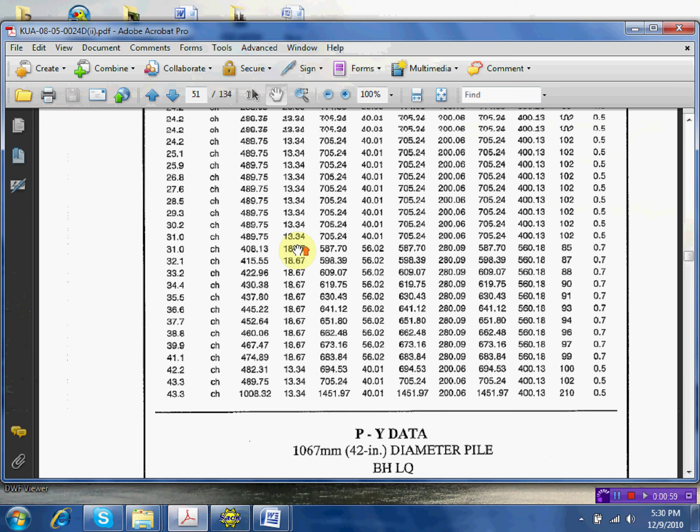We have PY data. The PY data represents the lateral springs of the soil, and QZ represents the bearing. So we will use this one in our PSI modeling.

Take note, our pile diameter is 36 inch or 90 centimeter. It depends on the parameter. For example, if you have a 42-inch diameter pile, do not use this in 36-inch. The pile diameter should be the same. In our case, the diameter of pile is 90 centimeter or 36-inch, so we will use the 36-inch.

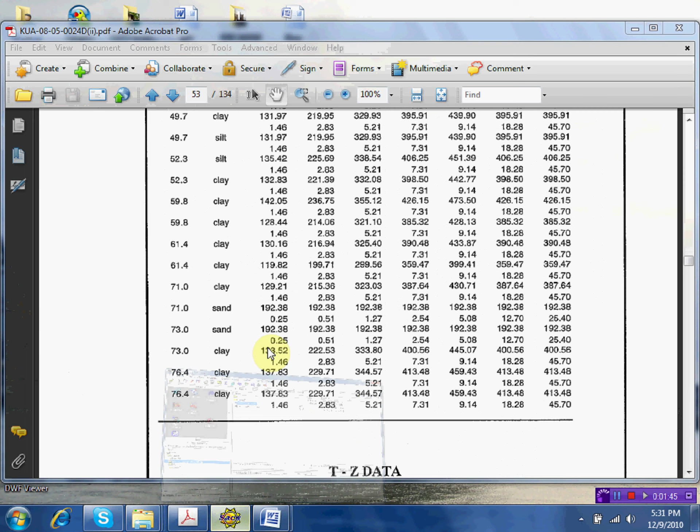So we will start with the analysis. This is 36-inch or 900 mm. Go to open your SACS software, which you already have, and go to modeling.

Go to modeling and we will use DataGen. It will look like this. Select create new data file, press OK, and it will look like this now.

We have static, model, post, static, dynamic, miscellaneous, utilities. Go to static and you see pile soil interaction, PSI. Select PSI program input, foundation pile, and soil property data. You see this at the bottom.

Select. So you are being asked to enter titles. We will put title as PSI, pile soil interaction, and then training.

Model file. PSI training model file. You can put any PSI or certain platform name. We will use 36-inch diameter because we are using 36-inch. PSI for 36-inch diameter training model file. If you have the name of the top side or platform, you can put it there. Press next.

This is automatic. Now we have to change this to SM. This is the final pile analysis option. We don't know what is EX, so you can check that. Press help and then select this.

It will look like this. You see EX calculate and report its pile in two separate planes. CB, we will select SM, meaning combine results with summary print only. Check SM, combine result with summary print. Press OK.

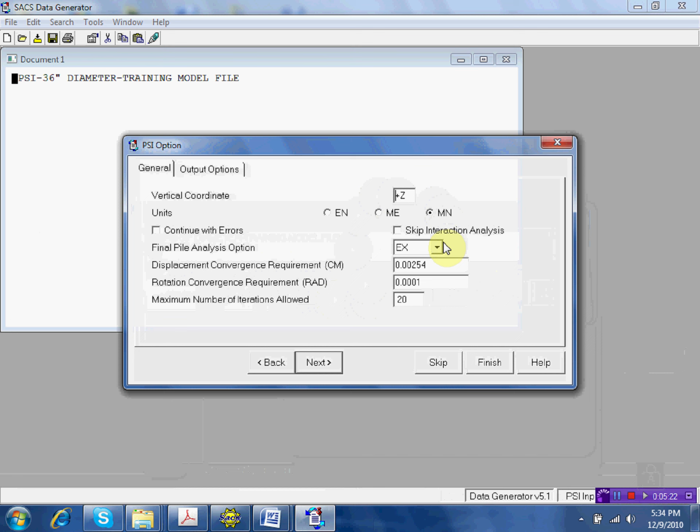Enter load cases to include the axial pile capacity and code check. Press no, because we will define the load combination outside. Press no. Have super element created? Press no, we don't need super element at this stage.

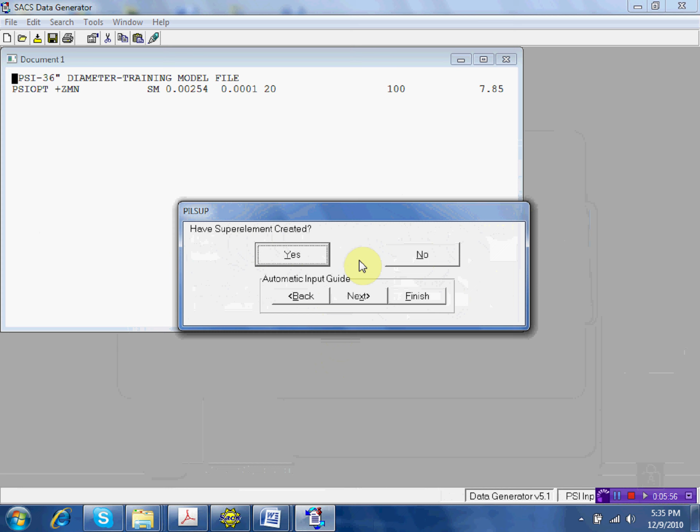This is modeling. Have plots generated? We will check yes. And then we have Lite, check Lite. Light grid major axis division - that's the grid on the plots.

I will choose Y and ZE envelope. This is the axis of the pile. So I will put YZE, and it's up to you if you want to have some plots.

In this case, I want lateral soil reactions, shear loads, bending moment plots, and lateral deflections. It's up to you what are the types of plots. These are optional.

Axial deflection, I will check this - axial deflection with envelope. Or you can choose unity check ratio. I will check unity check ratio. It depends on you.

Now we don't redesign the pile, so leave it as blank. After the plot parameters, press next. All piles, include all piles in the plots? No. Next.

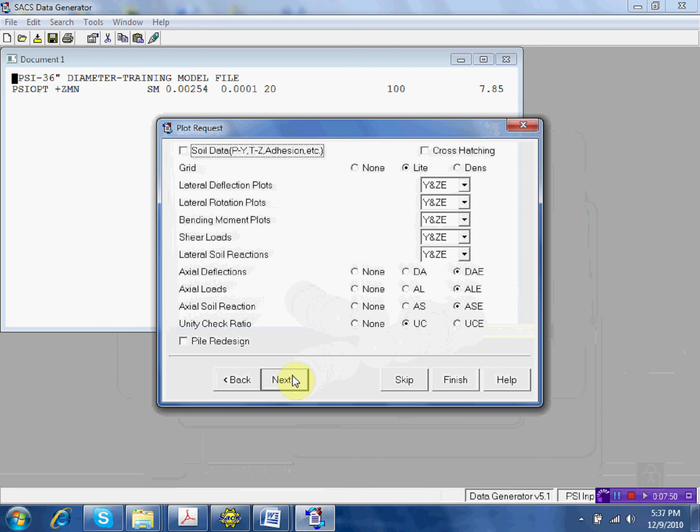Select load cases to be plotted, no. Specify plot size information, no. Enter pile section data - this is the case when you have tubular or wide flange section as your column or pile. In this case, we don't put enter pile section, so press no.

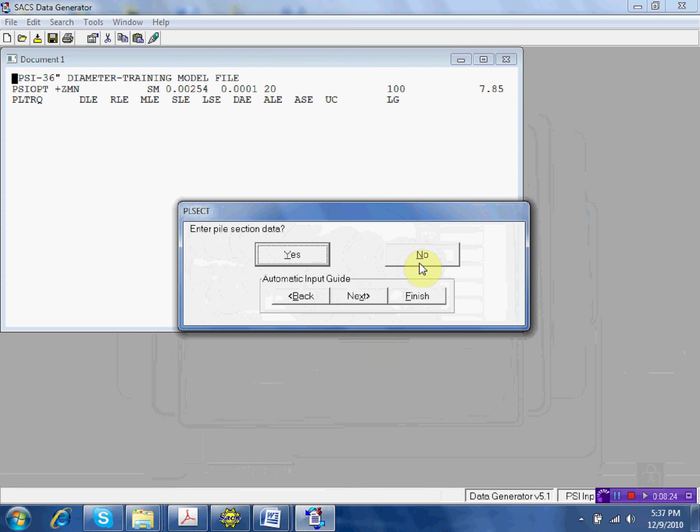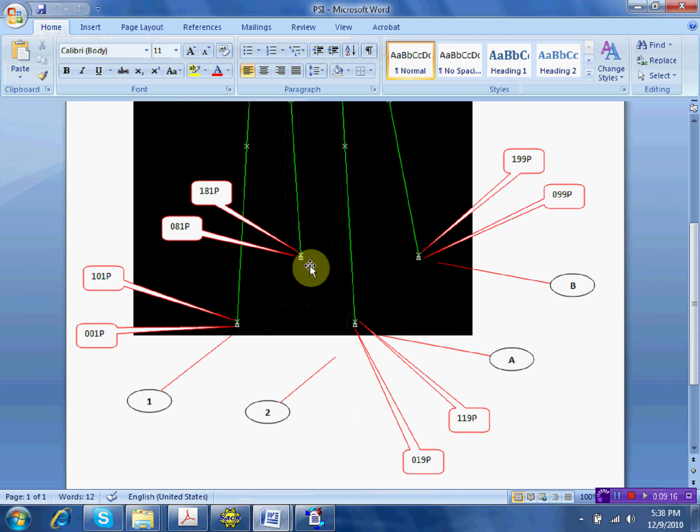For example, I will consider grouping the pile here. We have the pile head, and then the pile here as pile B1. Row 1, and then row B. So this pile here as PB1. I'll go back, PB1. So I will put PB1, meaning on row B1 as pile. And then outside diameter, in this case, we will use 90.

Okay, I think it's much better if I write something here.

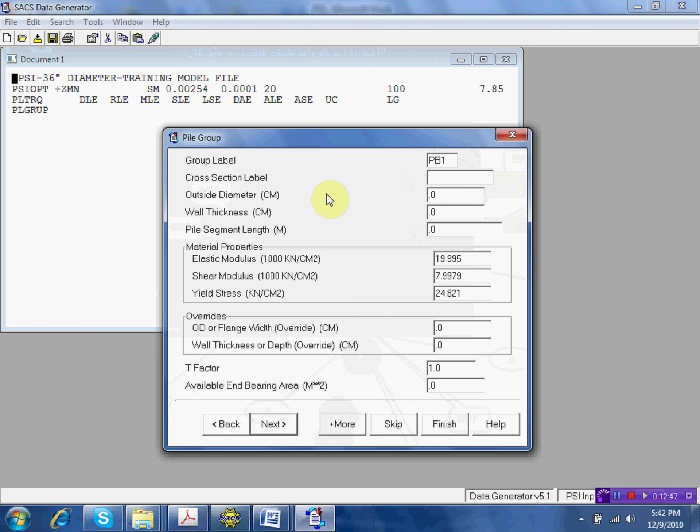Okay, so for PB1, row PB1, on that side we have outside diameter of 90, wall thickness of 2.54, and pile segment length 100 meters. And then we will change this instead of 19.995 to 20, it's the same, and 799 we will change this to 8, and the yield stress, 34.5. So this is now the pile at PB1, on that side.

Available end bearing area - how can we compute available end bearing area? There are two.

At the bearing area, we will say here - if you look at that one, if you treat this one, this is considered as plug area. If you treat this one like this, this is unplugged area. When this pile is driven, you have internal - this is not closed, usually it's like that. It's tapered like that, tapered, not closed.

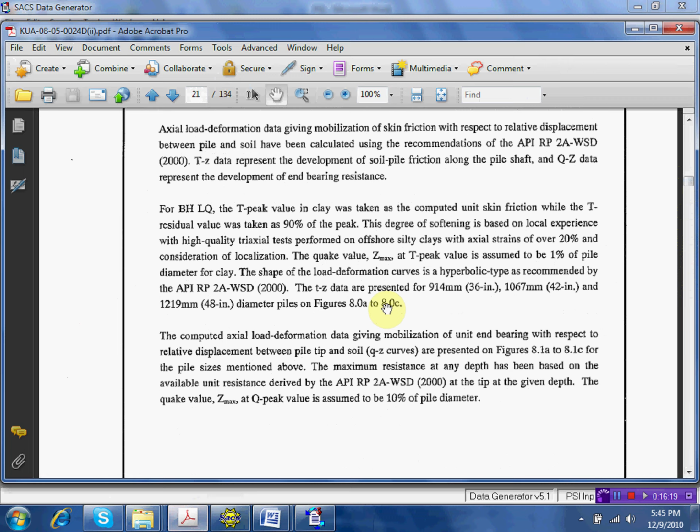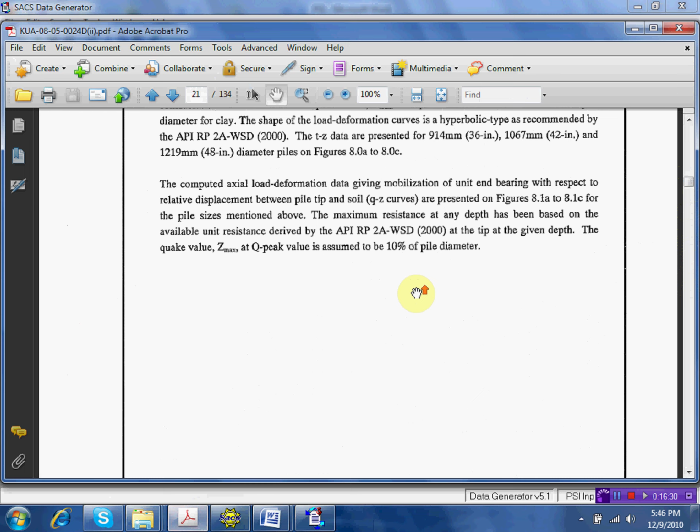Now, as per soil data, usually the geotechnical specialist will dictate. It mentioned here that the internal friction should be neglected. So internal friction on the pile is neglected, meaning we will consider this as whole section. The end bearing acting at the tip and skin friction acting along the internal wall should be neglected, so we'll neglect it.

So it is this one, unplugged case. Area will be pi times (d minus t) times t. Now you have to compute that one - how much is that? Area is pi and 0.9 minus the wall thickness, which is 0.025, times thickness. Well, anyway, this area here will be used in computing the allowable bearing capacity.

But take note, for allowable bearing capacity we will not use the SACS generated capacity - we will use this axial value here, this pile. We will use this one, so you can enter the value like that.

So in this case, the area computed is 0.0698, using that formula, pi times (d minus t) times t. So using that area, 0.0698.

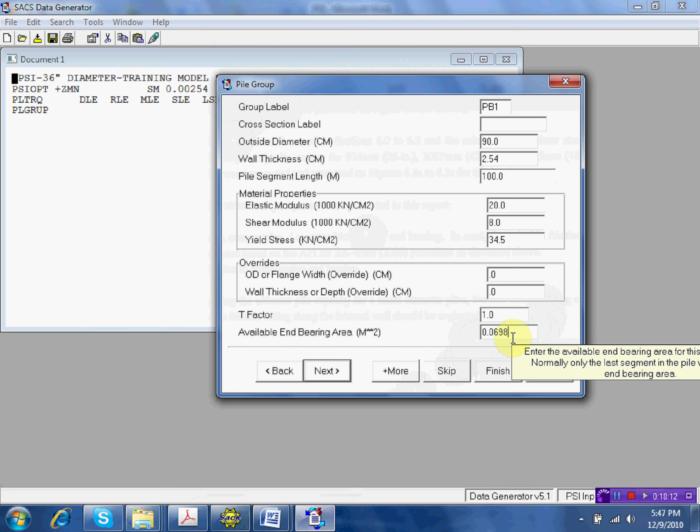Okay, so this is still at PB1, no? On that side. I will add more, so I will press add more. We have 4 piles here, we have 4 piles, so you have 4 groups. Add more. I will call this PA1.

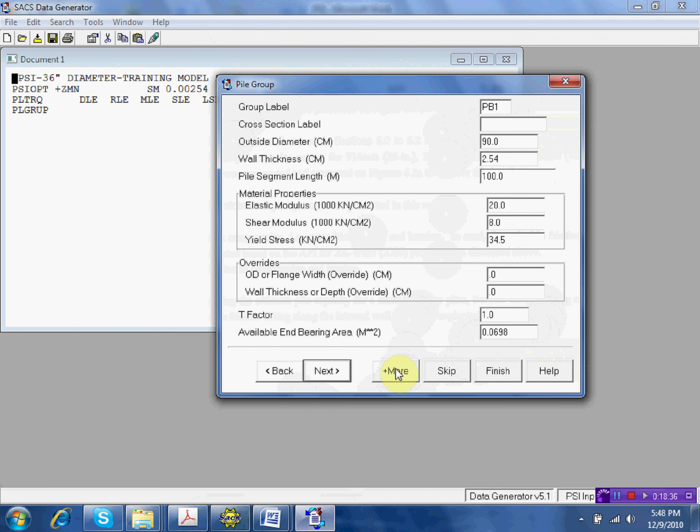PA1. Outside diameter is 90. The wall thickness is 2.54. Pile segment, assuming the same. And this one is 20. This one is 8. 34.5. And the end bearing is the same, 0.0698.

Okay? 0.0698. Now, this T factor, you can leave it like that, 1.0. Okay? We have now PA1. So, add more. PB1, PA1, we still have PA2, right?

On row A2, same. 2.54, 20, 8, and 34.5. If you have 8 piles, then you have 8 pile group. You have 8 pile group.

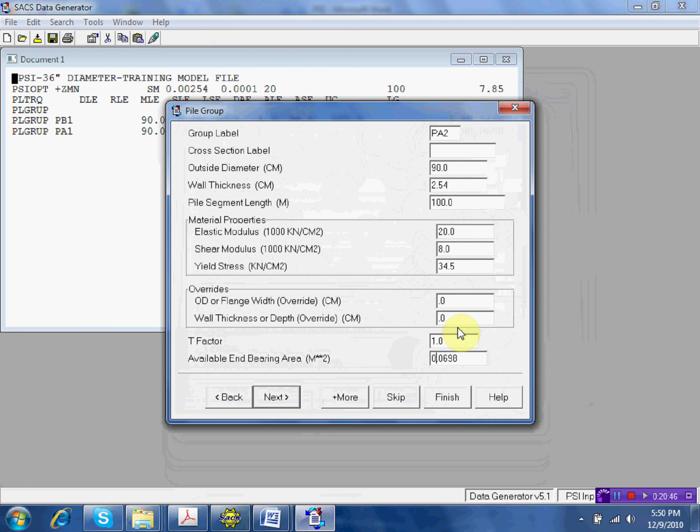Add more. PA1, PA2, and then PB2. 90. Wall thickness 2.54. Pile segment length 100. Assuming we don't know, just like that, nah? 20. 34.5. 0.0698. Okay, it's complete right now, right?

We have PB1, PA1, PA2, and PB2. So, press next.

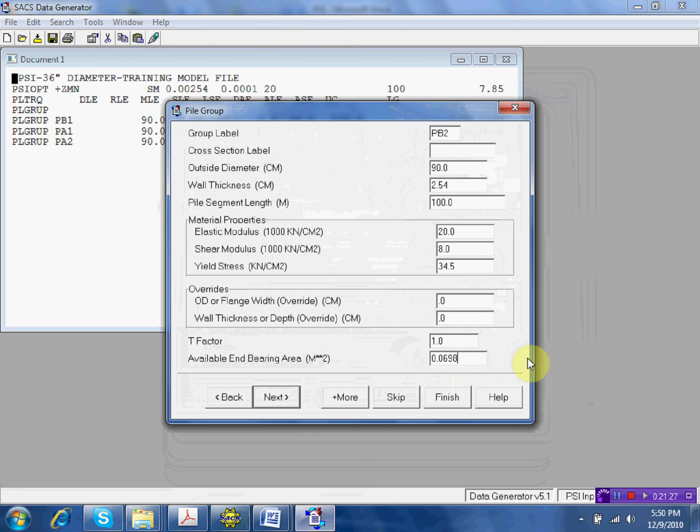Now, we have to consider the pile with plug or unplug by calculation. We will consider that one. Unplug. Why? You're not listening, huh? I told you this one, see? No, listen first. This one is for the analysis to run. We will not use this because these parameters here will be used in computing the bearing. We can use plug, we can use unplug, because we will use the capacity based on this curve here. Based on this curve. That's why no problem.

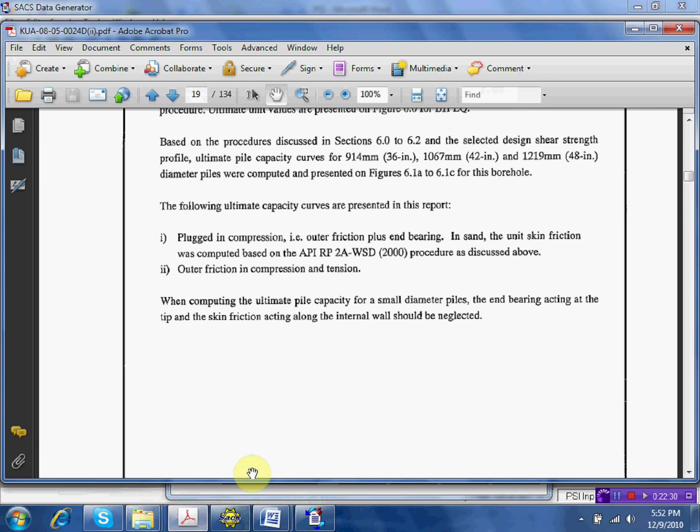Okay, now we will define pile head joint name. The pile head joint name is the pile head. No, this is name. The name is pile head joint name. So you have pile head. The pile heads are this one. Pile head, pile head, pile head, pile head. So your model should have fixity of pile head.

Okay? And then on the next, you have the bottom joint name. The bottom joint name is this. Bottom joint name. Okay, bottom joint name, bottom joint name, bottom joint name.

Okay, so I will define now the pile joint name. The pile joint name, for example, I will consider B1 is 081P. Yeah? 081P. And my pile group is, what is that? On 081P, PB1, PB1. It's PB1, right? You see this figure here, huh?

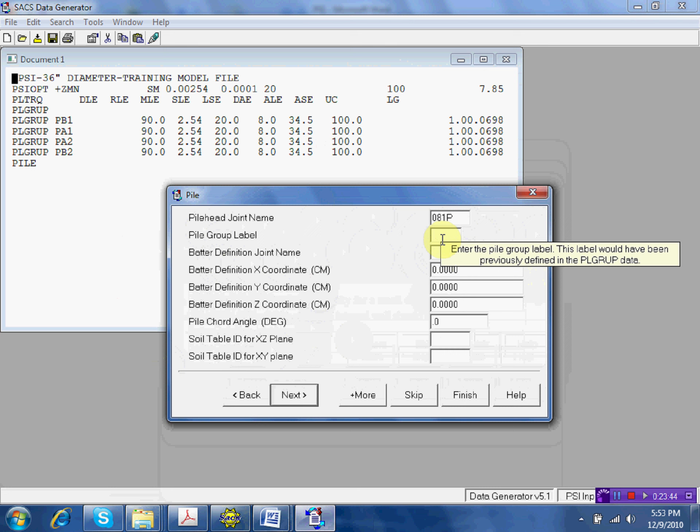On the drawing. And the batter definition joint name is what? 081P. It should be 181P. Is that correct? 181P, and it should be XZ. No? I will define this as SOL or SOL1. SOL1, no? XZ, ha? XZ plane. SOL1, meaning to say this is my first SOL.

So enter the SOL ID for the local XZ plane. This SOL ID will be subsequently defined on the SOL data. So you have two, now I will call this as SOL1. Okay? So enter here, enter here, enter here. Leave it blank. The pile chord angle or the shift will be used when there is mudslide. So in this case, we don't assume there is a mudslide. Okay, and then I will press add more.

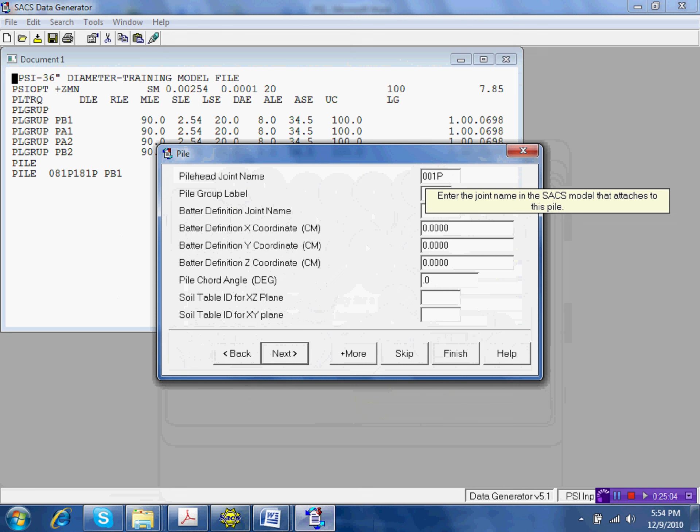So pile joint name, the pile joint name again, I will define A1. So 001P. The pile group label is PA1, right? PA1. And the batter definition name is 101P, 101P. Okay? SOL data XZ plane, same SOL, SOL1.

We will update this later on because this is made by, drilling will be done by jack up. Huh? So we have the design basis. Huh? The jack up rig. Add more. Another, so we have PB1, PA1. We have still PB2 and PA2. So PA2, the pile group is PA2.

Sorry. A2, 019P. Sorry, the pile group is PA2, 019P, and 119P. Okay, and this same soil, assuming the same soil, soil 1. Add more, you have 4, no?

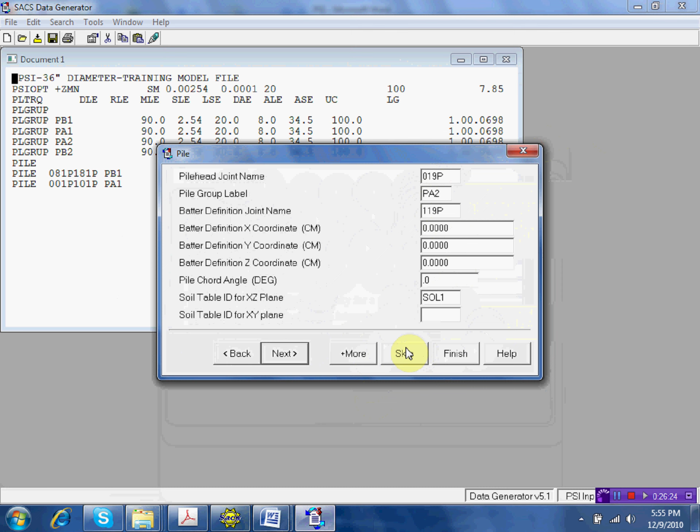You have 4 piles. The next will be B2, right? B2 on that side. 099P. Pile group is PB2. And then bottom joint name is 199P. Okay, and this one is Sol 1.

Do we have more? If stiffness of the conductor is considered, you should model also the conductor. Okay, so we will press next.

Now, the sequence of the PSI will always start with TZ. Okay, take note, it will start with TZ. Next will be bearing or QZ. And the last will be PY data. So that's the sequence. First is this, TZ curves. Okay, you put first step TZ curves. Second, QZ curves, that's the input, the input. The third is PY curves, PY curves. So that's the sequence.

So in this case, we have two, TZ curves user-defined or API generated TZ curves. In this case, we have the soil data. So we will use user-defined TZ curves.

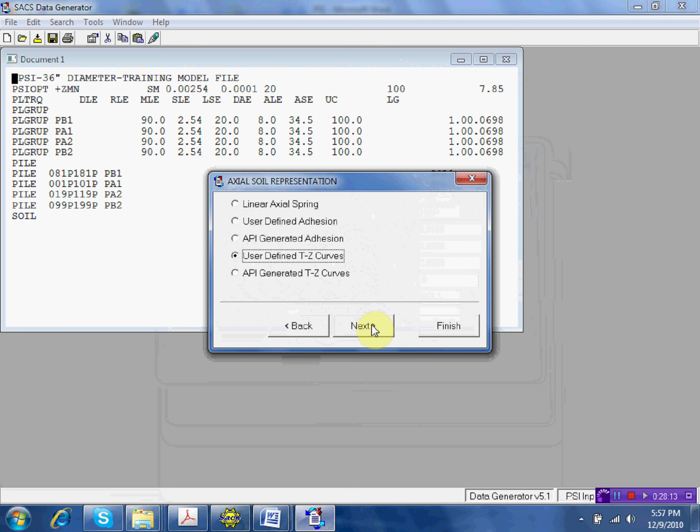User-defined TZ curves. Okay? So press next. In the TZ soil axial, you are being asked, how many soil strata do we have? How many soil strata? You should have a copy on this. Okay, so I have here, in the TZ curves, take note, TZ curves,

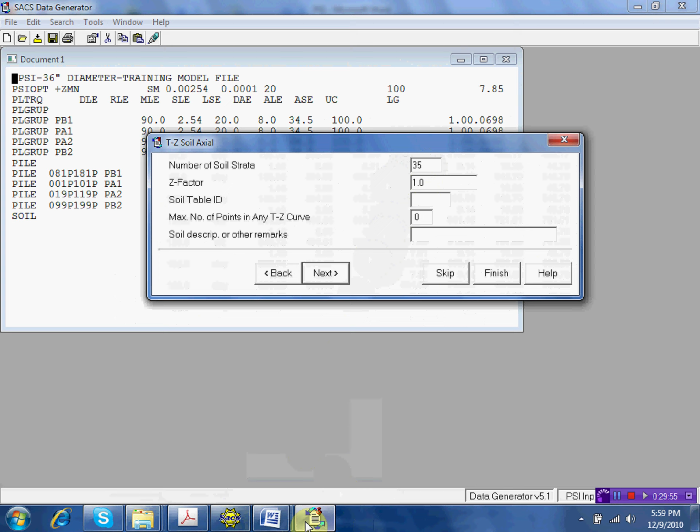So how many layers do we have? This is one layer. 1, 2, 3, 4, 5, 6, 7, 8, 9, 10. This is actually up to 35. Up to 150. So I will put 35 layers. How many layers? We will update that later on. I will put 35. It depends on the data. Like this, for example, if you count this one, 1, 2, 3, 4, 5, 6, 7, 8, 9, 10, then you put that number of layers. So I will put 35, for example, only.

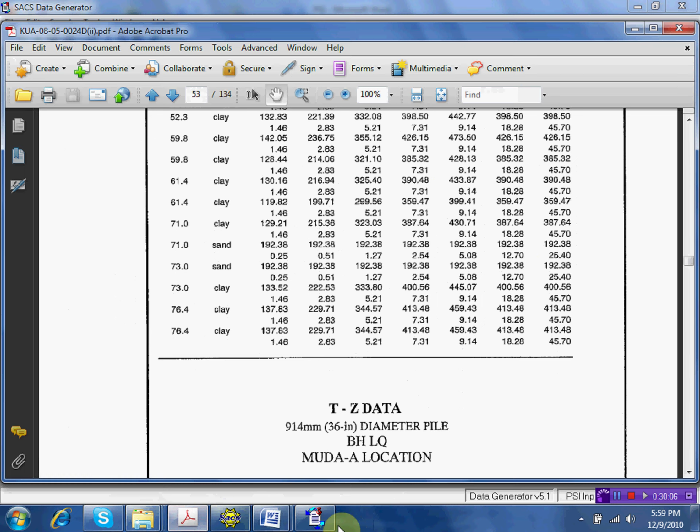And this one, we define this as Soil 1, right? If you put Soil 1, Soil 2 here, you should define what that soil table is. So in this case, that's Soil 1. The soil description, I will put TZ data. Okay? TZ, soil axial data. TZ, this is adhesion. Take note, that's adhesion because we will use that principle.

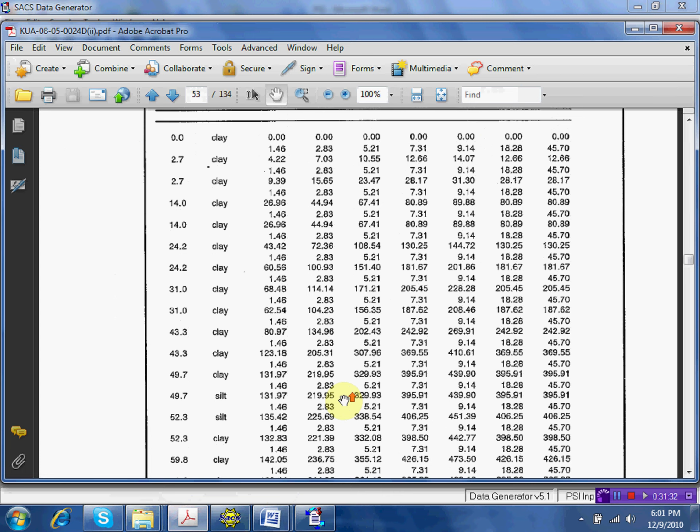for TZ data, for 914, this is what we call curve points. 1, 2, 3, 4, 5, 6, 7. So how many curves? 7. But I will put 8. Why? Okay, this is the rule. Always start your curve from 0, 0. Because in here, see, it doesn't start; this one is 0 and 1.46, right? You should start from 0, 0 because you get problems in running SACS. It will not converge.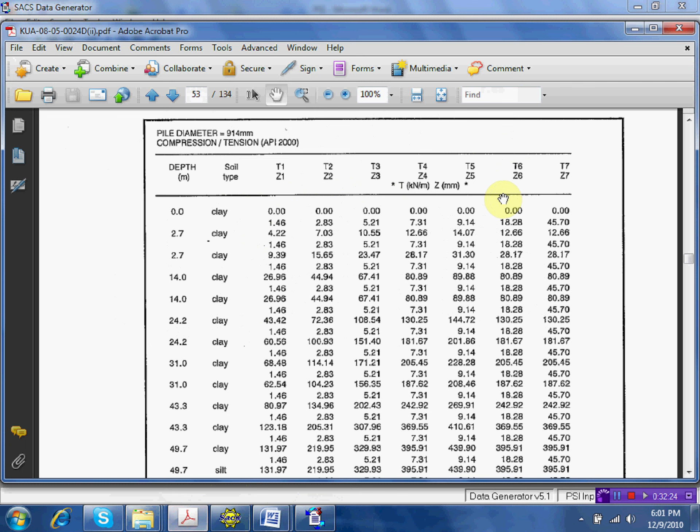So, if this is 7 curves, I will add 0, 0. It becomes 8. 1, 2, 3, 4, 5, 6, 7. 7 curves plus 0, 0, which is blank. In the curve, it will look like this. Always start from 0. So that's why 7 plus 1 is 8, and I put 8. Then what is the distance to the top of the stratum? You see, it starts from 0, so you should put 0.

Okay? So distance 0 and T factor is like that, and then I will put the type of soil. It is clay, so I will put clay. That's only a description of that stratum. Number of points in TZ curve is 8. And then I will press next. Then you have the TZ value. Just copy this one. But take note, I will start from 0, 0, so leave it like that.

You will start now at the second point, which is 0 and 1.46 for Z. The first is T, the second is Z. So, this is 0 and 1.46. I think it's much better if you have a copy of the TZ curves. That's actually page number 9. Always start with 0, 0. So, it will be 0 and 1.46.

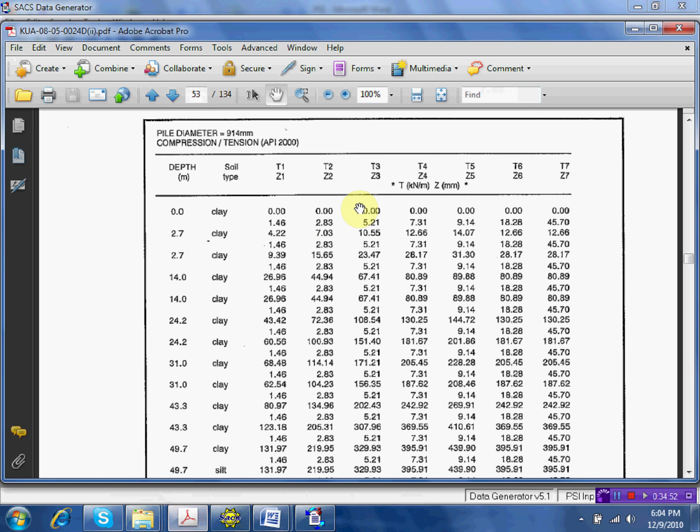So the program automatically will ask you, if you press next, for the TZ value. After 7.31, the next is 0 and 9.14, then 0 and 18.28, and the next is 0 and 45.7. You follow?

Be sure you understand. The first is T, below that one is Z. That's TZ. Okay. So I have now 8 curves. I will press next.

So, you see, my input of number of strata is 35. So, 35 strata required and 1 input so far. That's the first input, right? This is the first input. So you put yes. Add more strata? Yes. What's the next strata?

Again, press symmetrical TZ option. How many number of points in the curve? At 2.7, still 7 plus 1, that's 8, right? So I put 8. And what is the distance to the top of the stratum? 2.7. What is the type of soil here? Still clay. Clay. Okay? I will press next.

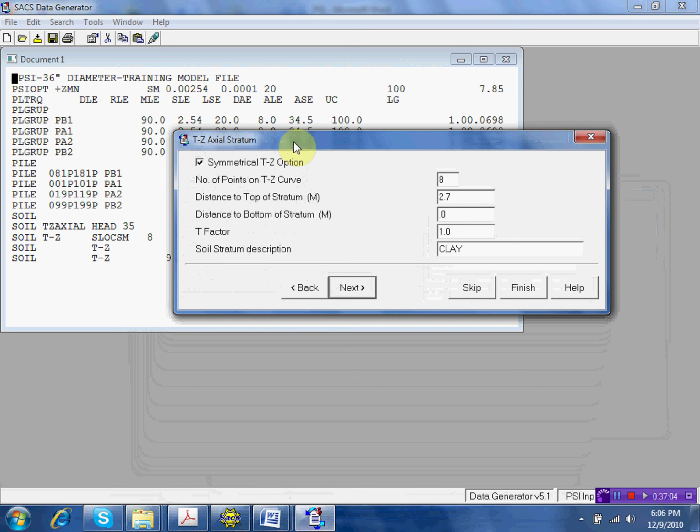The next now, take note, you should always start from 0, 0. So you will be at the second now. 0, 0. The next will be 4.22. The corresponding Z value is how much? 1.46. Be sure you know where this comes from. 4.22 and Z of 1.46. 7.03 and 2.83.

10.55, 5.21. 12.66, and then 7.31. Okay. Usually for soil modeling, it takes half day or 1 day. If you have, let us say for example, 0.1 increment, you have so many strata. Okay?

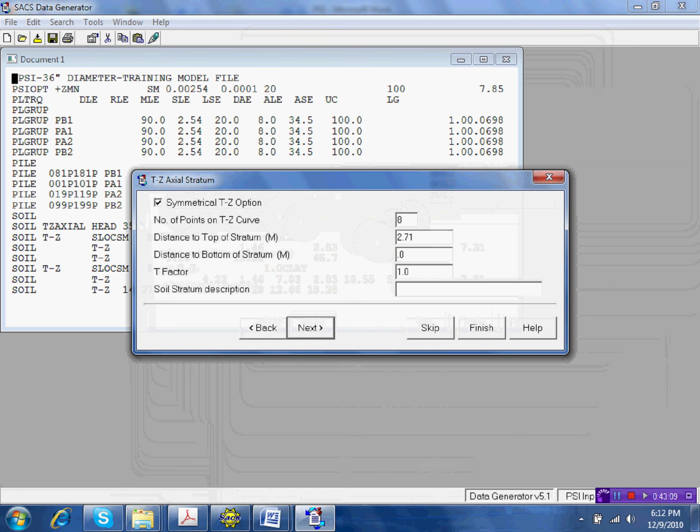If you have two of the same strata, do not neglect the other one. So the technique here, instead of putting 2.7, you put 2.71 or 2.705. You notice the second strata is 2.7, right? The third is 2.7 also. Do not put the same strata. You get an error in the file. So you put a small difference. So in this case, I will put 2.71.

Okay? 2.71. A small difference won't matter, because they are the same. If you insist on using the same value, you have a problem in the analysis. Again, the soil type is clay. Next, always start at 0, 0. So the next one will be

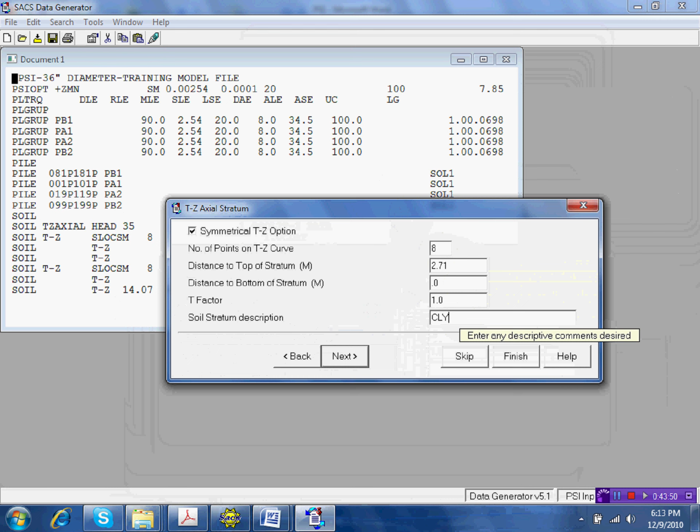9.39, 1.46, 15.65, 2.83, 23.47, 5.21, 28.17, 7.31. So just input the value. 28.17, 7.31. Okay? 7.31.

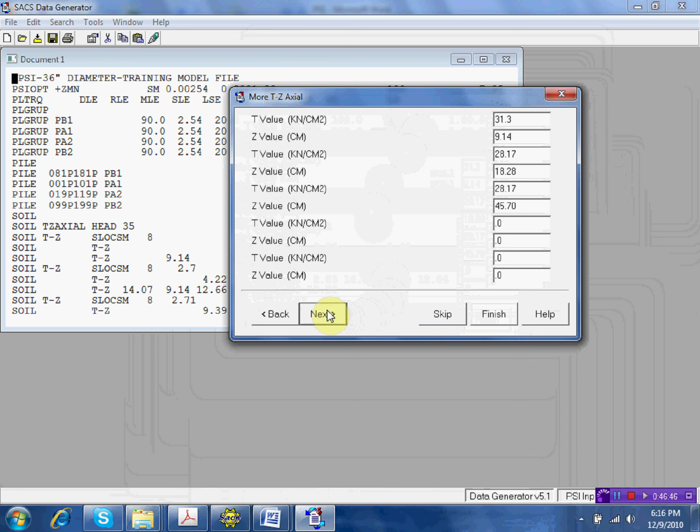So you will add more layers. I just only stop here because I want to emphasize this 2.7 level and this 2.71. So if you encounter that, do not neglect. Just add a small distance. It should be increasing. So 2.7, next will be 2.71. Okay? So I will go to next.

Enter more strata. I will not enter more strata. You are going to update this one. Just copy and paste and then update. That's the procedure. So I will go to next. See, enter TZ bearing data. I told you the first is the axial or the friction, TZ. The next will be Q bearing. Press yes. How many soil strata do we have?

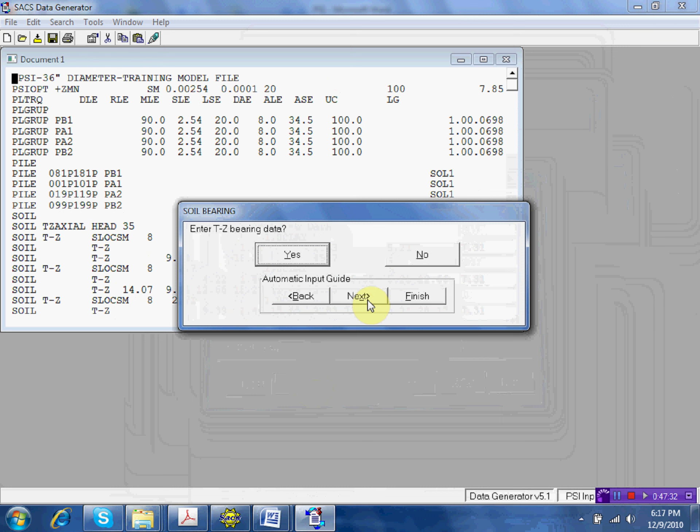Okay. Now in bearing, we don't need to add all the layers. What we need is only the point near the tip of the pile. Meaning to say, usually somewhere here, around the 100 level. So maybe you will include, if there is, level 90, or in our case, QZ. Go to QZ data.

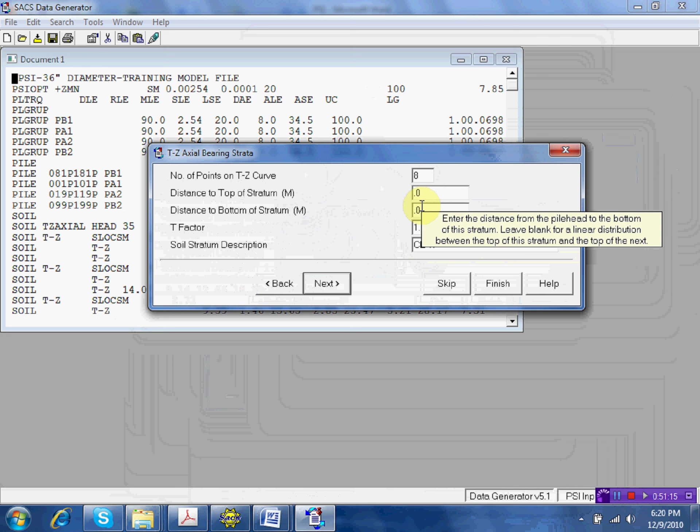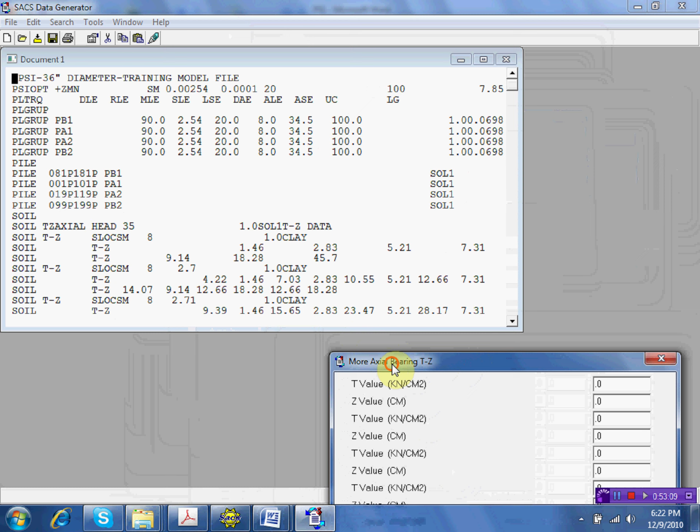Okay? Next. T value again. We have, where are we? 26.6, right? 6.75, 9.55, 91.44, and 295, and 457.2. Is that correct? Okay. Press next. Enter more strata, yes.

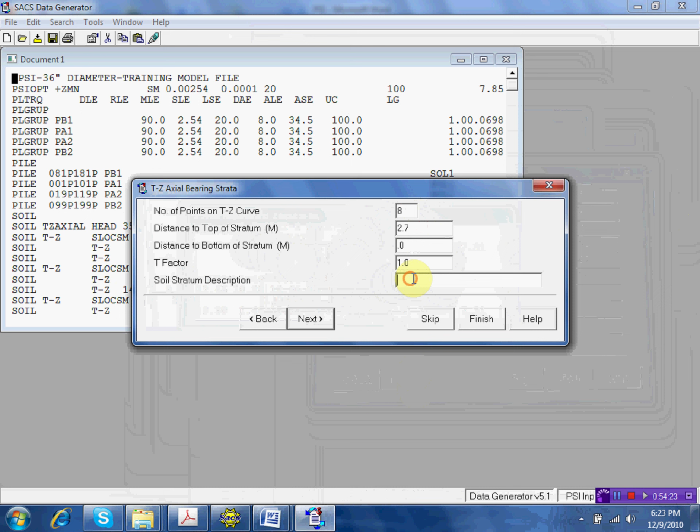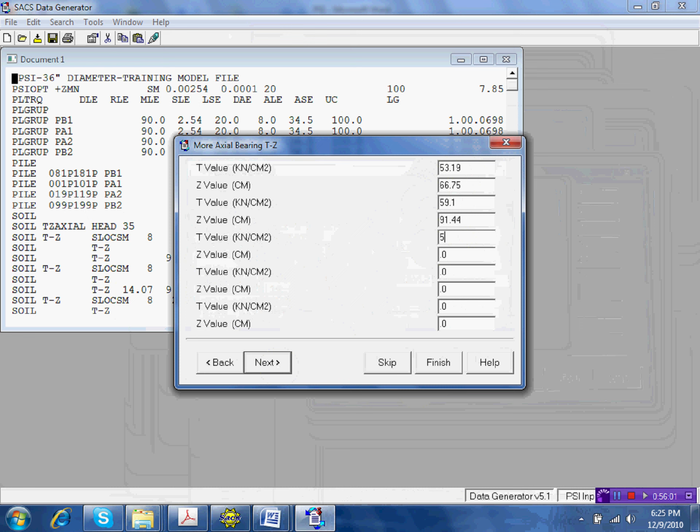Another T value: 53.19, 66.75, 59.1, 91.44, 59.1, and 457.2. Okay. Press next. So you know already the procedure. If this is 2.7, you put 2.71 for the next layer.

Why should I put 0, 0? This is wrong. It should start from 97.9. It's bearing, remember? You start from 97.9, sorry. Anyway, we can update later on, because we started at 0. QZ should start from 97.9. It's just the same, no problem. So, enter more strata? I will not enter more strata, I will press no. Meaning, I'm already done with the bearing.

Next will be torsional spring, because it needs torsional spring. So, torsional spring, linear. Check this one and press next. Soil data, still Soil 1. It is needed by the program to run. Now, what is the torsional linear stiffness? We will use a certain formula from torsion. A solid rod subjected to torque: TL over JG. But the torsional stiffness is defined by this: GJ over 0.5 of the length of pile. What is J if it is circular?

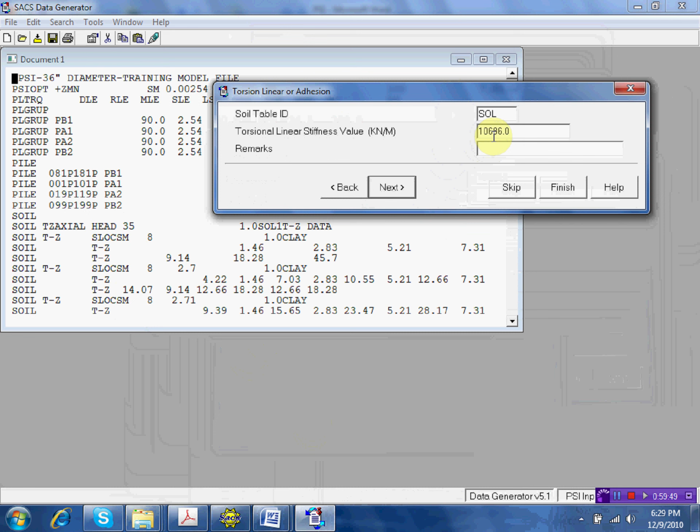And I will call this one pile torsion. So first TZ, second QZ, then another parameter, the torsion, linear. I will press next. Okay?

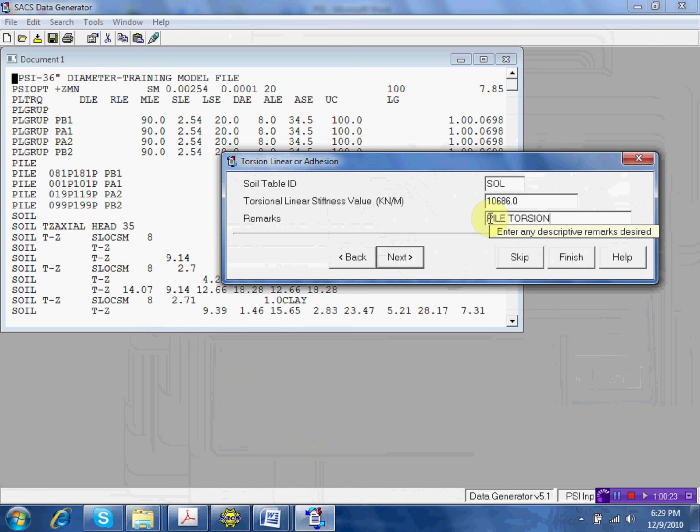Press next. The next will be Soil 1. Soil table is Soil 1. Soil 1. Oh, what is the file? Soil 1. Next. Soil 1, you should put Soil 1, and then the next will be the API PY curves or the user-defined PY. You check user-defined PY. Soil 1. Torsional is 10686. 10686. 86. Yeah. And then remarks.

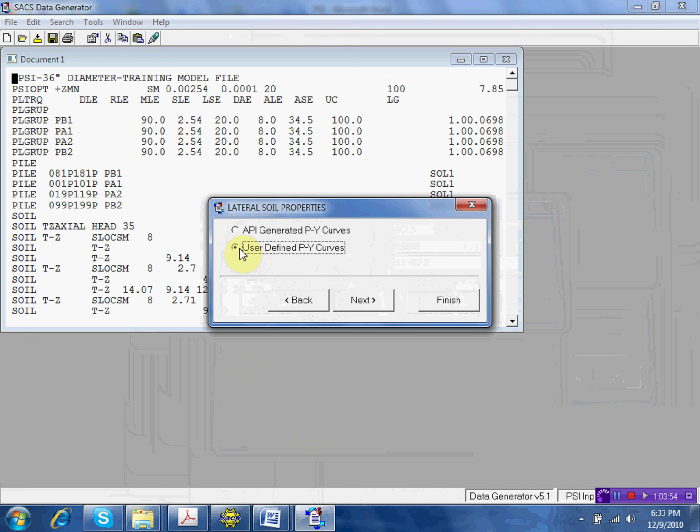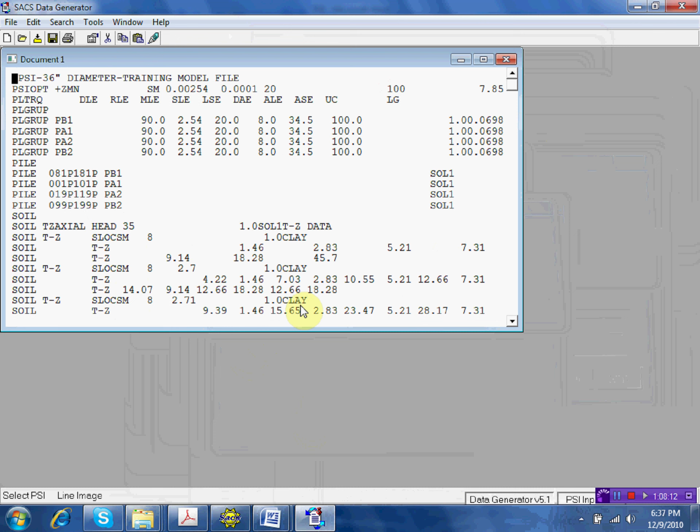So once you are outside of the automatic generation, don't expect the program will automatically pop up. So what I'll do, the next will be the lateral, no? Lateral head. Select. It will look like this. How many strata do I have? So I will count. 35. Is that 35? Okay, just put 35. Anyway, we can update later on. What is the reference diameter? Soil ID first, Soil 1. Reference diameter is 90, right? And remarks, PY data.

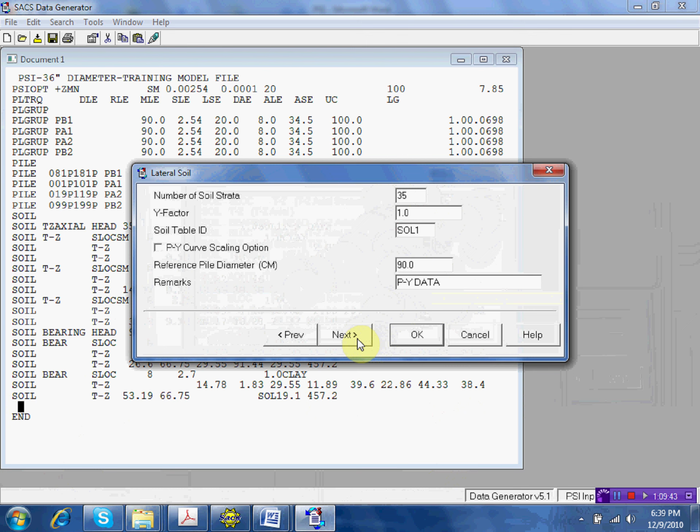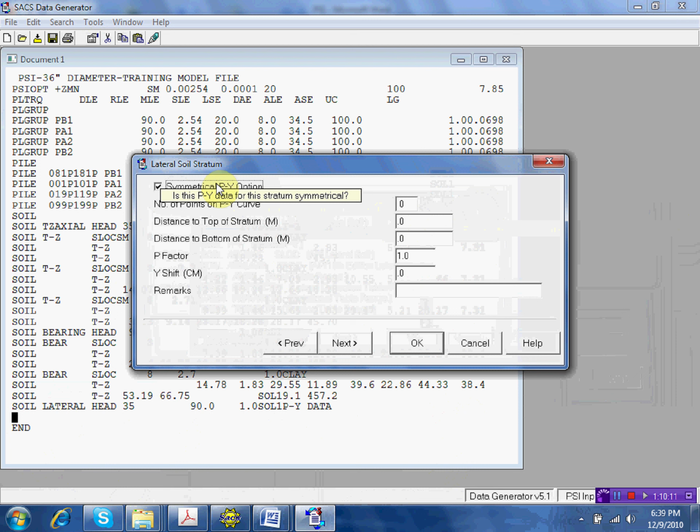If you press next, it's no longer automatic. See? It's no longer automatic. So what will you do? Manual. You know manual, why worry? Right click, insert line. You are now at the PY lateral soil stratum. The first is the head. The next is the PY lateral stratum. Select symmetrical PY option curve. And how many curves? 5. We are already at PY. This is 4 plus 1 is 5. 5 curves. What is the distance? 0.

0. Y shift is for mudslide. Do not put Y shift. That's for the mudslide. Enter the value used to add the Y shift to shift PY curve, primarily used for mudslide condition. What is the remarks? Clay. Next. So, you got a problem already. But we can manage.

Insert line, and then go to soil PY. The first is lateral. The next is PY lateral soil stratum. The second will be PY lateral, soil PY. You see the sequence? First is the head. The second is the stratum. The third is the TZ. So here, I have already defined this lateral head. The second will be the input, the PY data. Press select. Okay, so it's just the same.

P value, how much? Always start from 0, 0. So the second is 6.86. Y of 47.5 or 45.7. Next is 9.87. Next is 137.1. Are you following? The second is 0, and it becomes 685.5. And then 0, and then it becomes 1371.00. 1371.

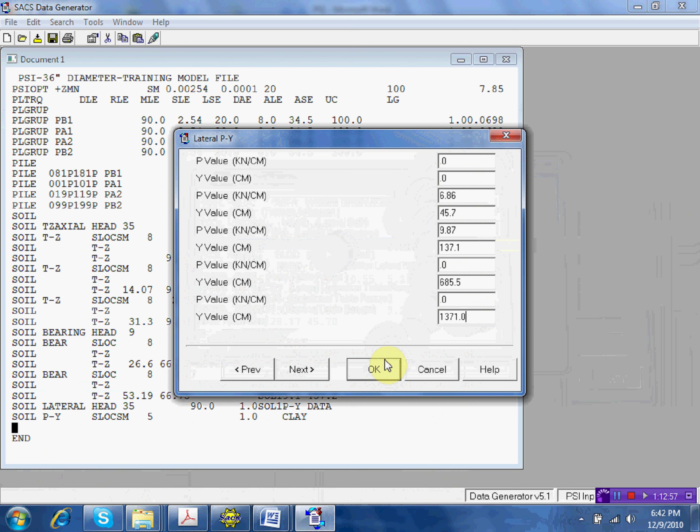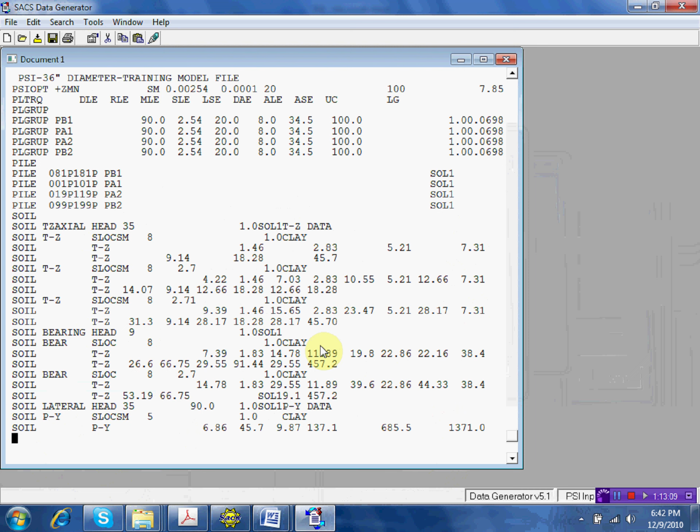Okay. Zero, always start from zero. Press OK. You add. Same as this, so I will just copy this one. Copy this, because we are now not on the automatic mode. So this one, put your cursor here, press Control, and then scroll down, right click, copy, right click, paste. Oh, same.

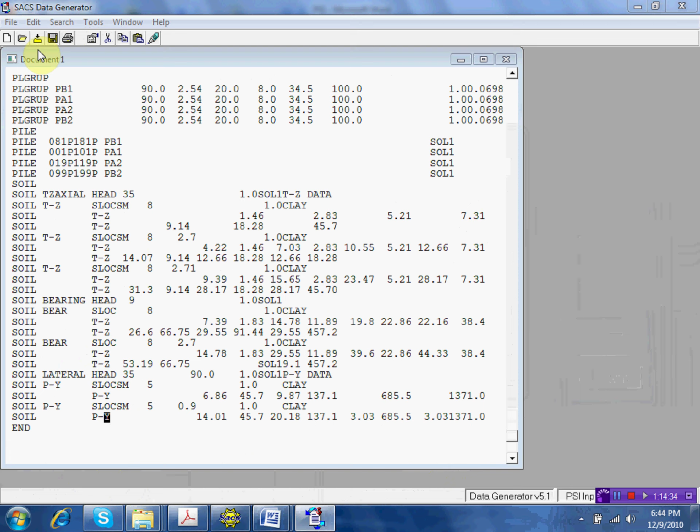You save the file. I will put PSI INP. You save the file as PSI INP and put model. Okay? And press save. So I have already here. So you add another, same as this.

Okay, so actually this is the format. So if you put 35 here, you should have 1, 2, 3, 4 up to 35. So in this case, to check, you have to put like this. Put your cursor here. Press enter. Then I will put an asterisk sign. No, this one is my first layer. Follow? Put my cursor here on the next digit. Enter. And then I will put asterisk. And this is my second layer.

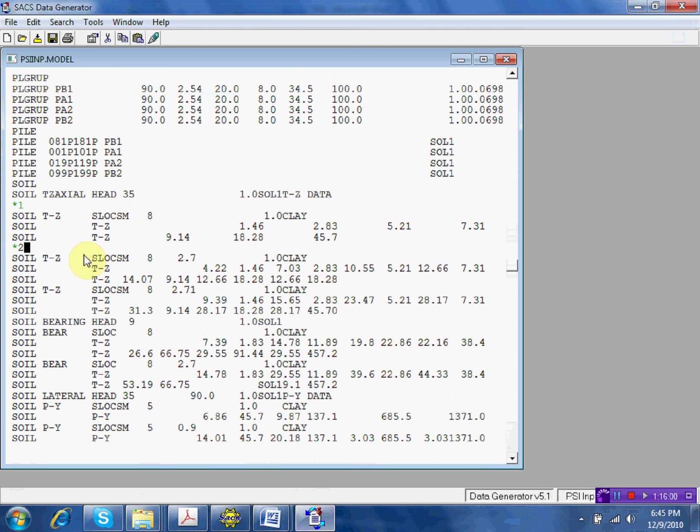This one also, in the digit. Put asterisk. The third layer. So you still have 32 layers more, right? Because this is layer 1, layer 2, layer 3. Okay? So we will update this now. My question now, is this correct? Is our input correct?

First, we will go back to TZ data. Here. In the TZ actual data, see, SACS is kilonewton cm squared. You see this? In SACS, the value should be kilonewton cm squared and Z value is centimeter. And in our data, what is the value? T is kilonewton per meter and Z is millimeter. Is this consistent with kilonewton per cm squared and Z in centimeter? It's not, right?

So what will we do? You get my point? In the actual data, the T value is kilonewton per meter and the Z value is millimeter. But in SACS input, it is kilonewton per cm squared and Z in centimeter. So, to automatically change this, we have what we call the T factor and Z factor. How can we define T factor? You see, our value in soil data,

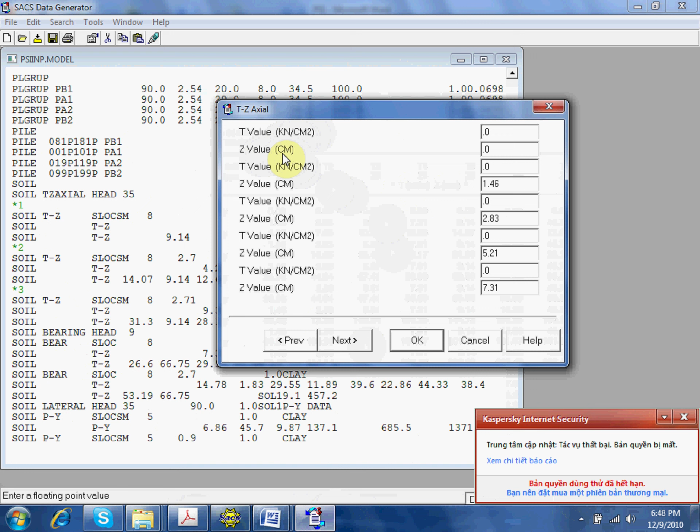T is what? This is very important. Kilonewton per meter. And in SACS, what is the unit? T value, kilonewton per cm squared. So you convert kilonewton per meter into kilonewton per cm squared. How? Take note, T is adhesion. It's on the perimeter. So kilonewton per meter, I will convert meter first into centimeter. So 1 over 100, that's centimeter now. The meter is cancelled out.

And then I will divide this by the circumference of the pipe, because that's adhesion. So it becomes 1 over pi times diameter of pipe, in centimeter. So this is now the T factor: 1 over 100 times pi times the diameter, 90. This is now kilonewton per cm squared. So the factor is, I have my calculation, 3.54 exponent of negative 5. That's very important.

We have T factor. The next is Z factor. You see, in soil data, the Z value is in millimeter, right? And in SACS? Z is centimeter. So what will be the factor then? 10 mm is 1 cm. So Z factor is 0.1. You don't need to multiply one by one because SACS can do it for you in terms of the TZ factor.

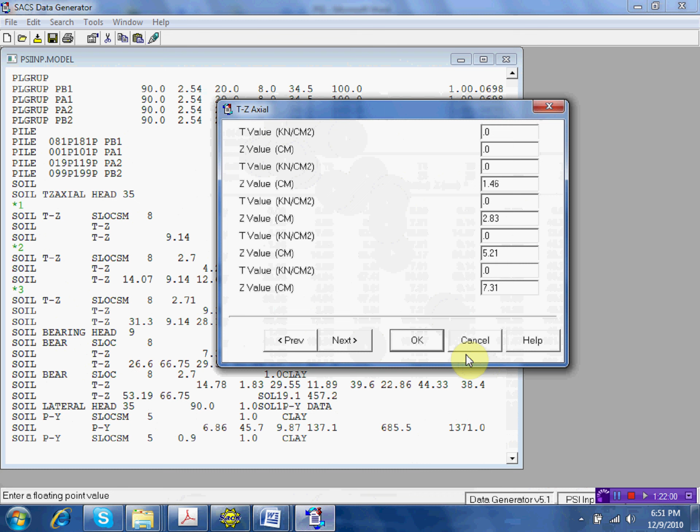How to apply? You go here. In this soil, not TZ. You have here, see, the Z factor. I will put 0.1. My Z factor is 0.1. So when you run the analysis, all the values here will automatically be multiplied by 0.1. Z factor in this one, you double click this head, and then 0.1 Z factor.

Another in here. T factor, see? What is our T factor? 3.54 to the exponent of negative 5. So 3.5, you press shift E. E for exponent. Enter the factor for the subsequent T values to be multiplied by. And then minus 5. 3.5 E minus 5.

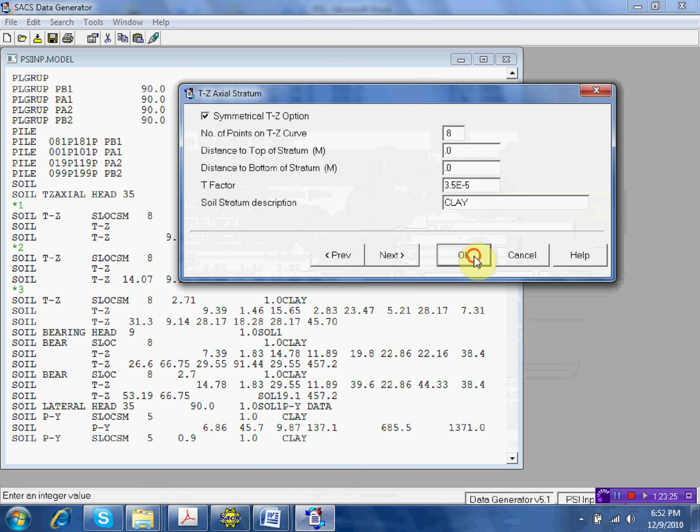Okay, this side, T factor. 3.5E minus 5. This one also, 3.5E minus 5. T factor. Now if you put 3.54, you get a problem because it's only 2 digits. You cannot put that, see, if I will put 3.54, see? I have error. Just only 3.5.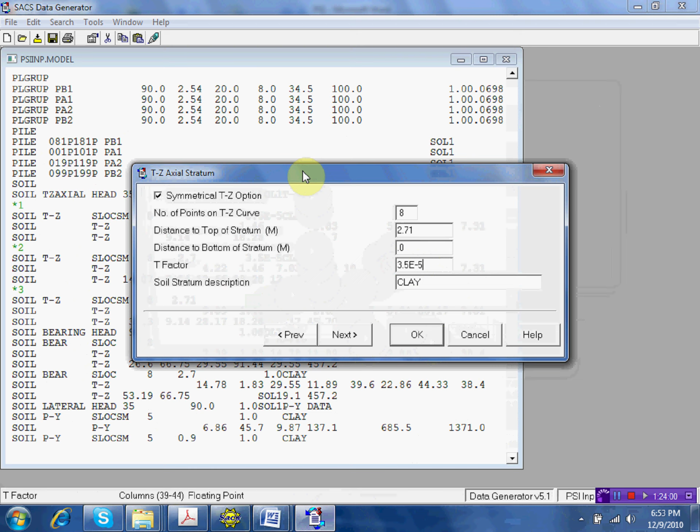How about bearing? Bearing, say you have Z factor for bearing. Try to check the QZ data. QZ data is kilonewton, right? And the value of T is kilonewton per cm squared. So you will convert kilonewton to kilonewton per cm squared. What will you do? Q, take note, Q is bearing. The bearing is the circular area, right? So divide this by area of the pipe, pi d square over 4.

No problem. This is for calculation only, for actually the bearing. The bearing is used only for the program to run because we will use the value here, this curve, in the ultimate pile capacity curves. Okay? So I got a value, and Z also, you notice Z, how much is Z? Centimeter, right? And the value in QZ, centimeter. So still 0.1, right?

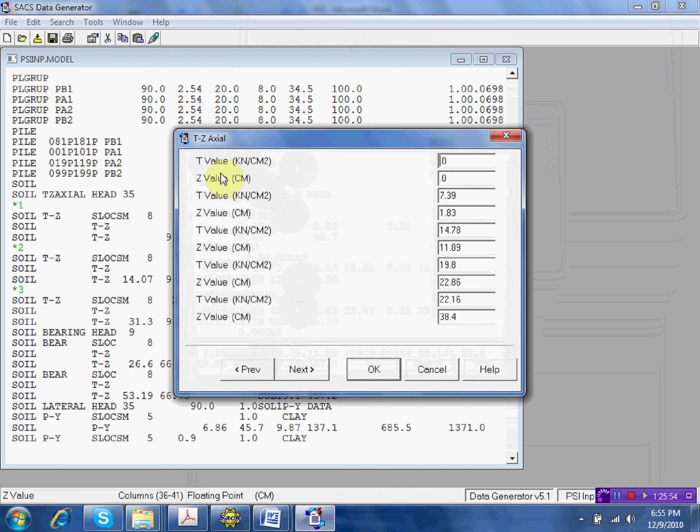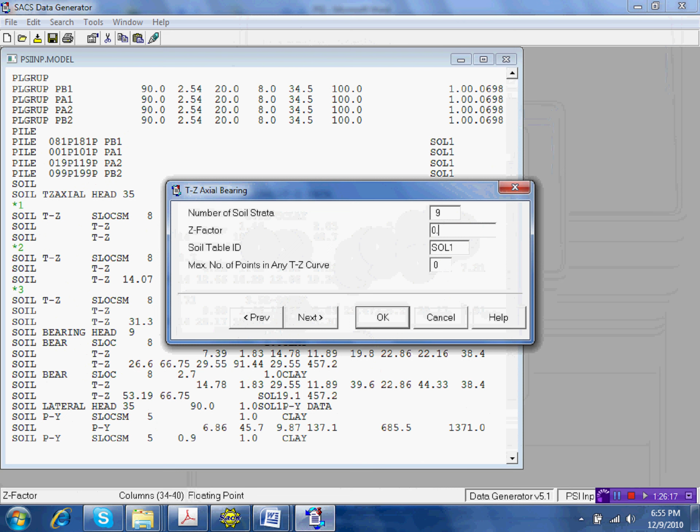Okay, so I will press okay here, and then I will put Z factor is 0.1. This one here. T factor, the T factor is how much? T factor is 1.6E of negative 4. This one, T factor here. So I will put space and then minus asterisk. This is my first layer, so I have 1.6E-4 here, double click as my T factor.

And the second layer, enter, shift and then 2, and then in here I have my T factor of 1.6E minus 4 for this one. And the third layer, no more, so you add. Okay. So that's TZ factor.

To emphasize, you can put like this, in information only. T factor equal to, so T factor is kilonewton to kilonewton per cm squared, right? So my T factor will be, to make kilonewton to kilonewton per cm squared, my T factor is kilonewton divide pi divide 4 and times d square. So you put, sometimes it's needed, na?

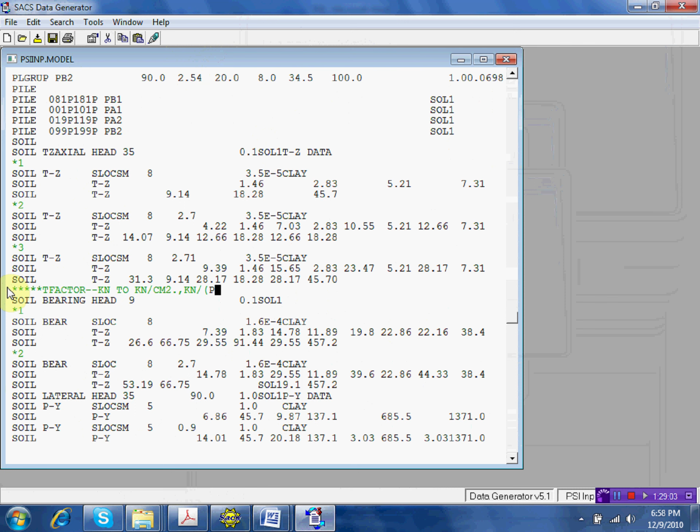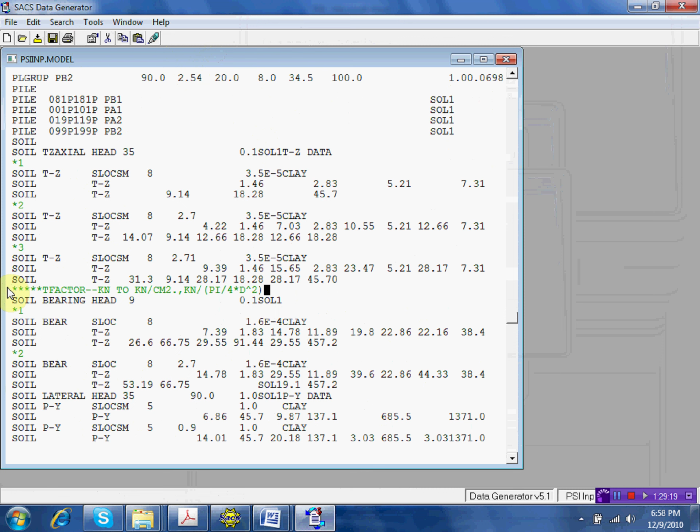So 1 over pi d squared, so answer is 1.6E minus 4. So 1 over pi d square over 4, where d is 90 cm because it will be in kilonewton per cm squared. And then you can put some information also. Z factor, the value is in the original file mm, right? You convert it to centimeter, so I have my factor will be 1 divided by 10, 1/10. So factor is 1 over 10, and that's 0.1. So that's why I put 0.1 as my Z factor.

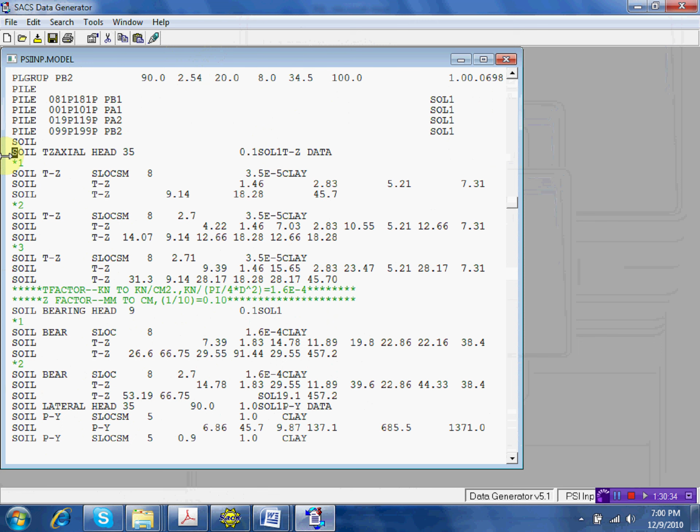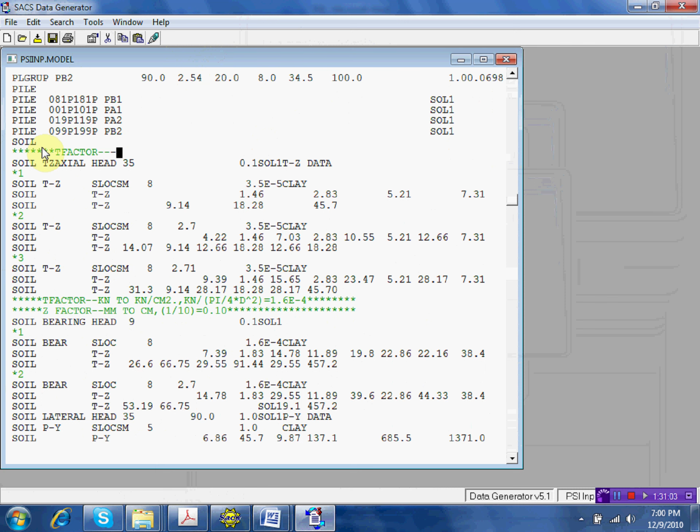Some information, in here also for the soil TZ, T factor, the original data, page number 9, is kilonewton per meter. Convert it to SACS, which is kilonewton per cm squared. So I have factor, kilonewton per meter times, so you can put 1 over 100 times 1 over pi d, pi times d, meaning circumference, na? So equal to, I have the value of 3.5, exponent of minus 5. Some information like that.

And the Z factor, from millimeter to centimeter, so to make that centimeter from millimeter, I have to divide it by 10, right? 0.1. Save.

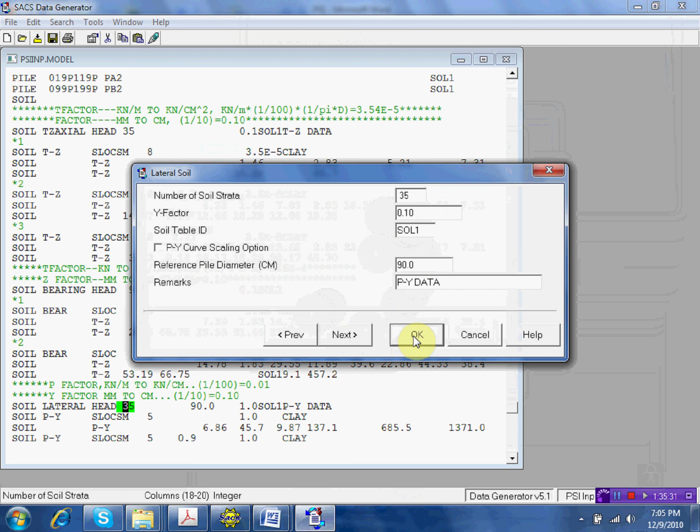And my Y factor, from original SACS soil data, millimeter, to, if you double click this one, the unit is in centimeter, na? So to centimeter, so you have 1 over 10. Is that correct? 0.1. So you apply here, Y factor is 0.1. And the P factor, see, you have P factor of 0.01. And this also P factor of 0.01. 0.01 P factor. 0.01 P factor. Okay, be careful with PY data.

There are two types of PY data. One is the cyclic, the other one is static. So which one are you going to use? PY data, cyclic and static.

PY data. One is static PY data, the other is cyclic. So when will we use PY data static and PY data cyclic?

Use static for boat impact analysis and earthquake or seismic analysis. Cyclic, use in place and fatigue. Why do we use cyclic in place and fatigue? There's a reason. Because cyclic is usually waves, and fatigue is also waves, so use cyclic for repetitive types of loading.

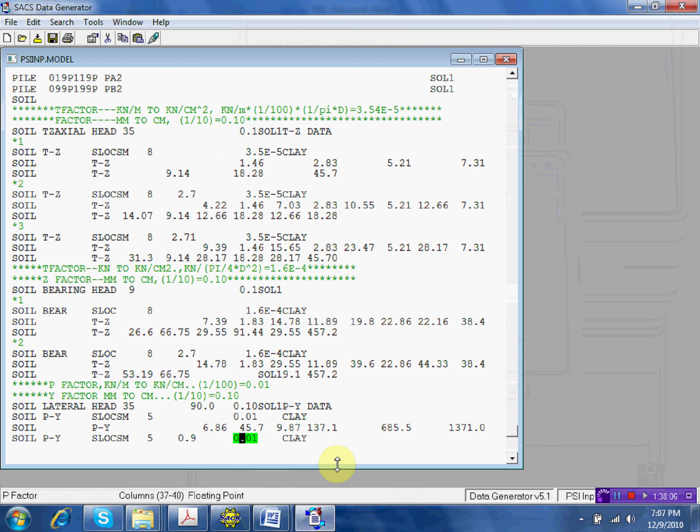Once only. Boat impact is once only. Earthquake is once only, not all the time. But when subjected to wave, it's always in place, subjected to wave. So if we compare cyclic PY and static PY, the cyclic is more flexible because it's subjected to repetitive types of loading.

So after we model the soil data, because this is not complete, right? This is 35, so we're still up to 3, so you will add another layer. As long as you know the principle, you can add. So for example, I will add another layer. Just put the cursor here, control and then scroll down. Right click, copy, right click again, paste.

So I have now the 4th layer. Then update this one, now update this one. 2.71, what's the next? TZ. 2.71, its next is 14. So I will put 14 here. 14.

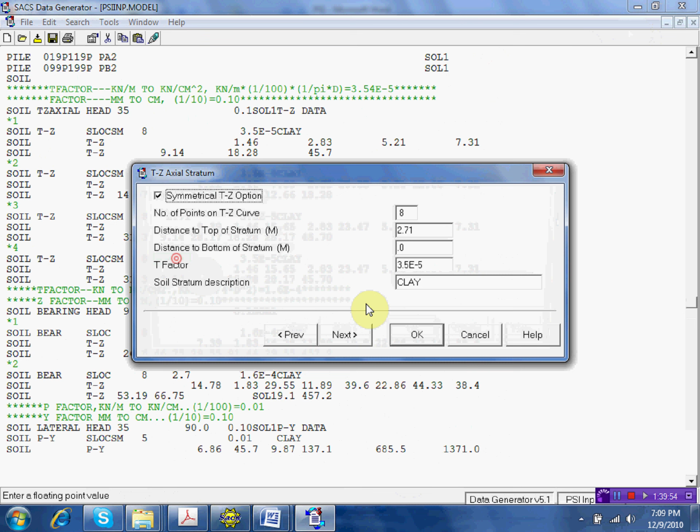This is what we call intact soil. Meaning there is no degradation due to the spud can. Now, when drilling will be done by the jack up, soil near the spud can will be disturbed, so there will be what we call degradation of soil.

We have stated this in the design basis. If you read the design basis, in the last part it says: the effect of spud can holes from the jack up rig shall be considered by reducing the undrained shear strength and Tz and Py values by 50% between mud line and maximum penetration of spud can. So up to 30 meters, you reduce Py and Tz by 50%. No degradation effect will be considered for soil away from the spud can. So in this case, we have two types of soil: one intact, the other degraded.